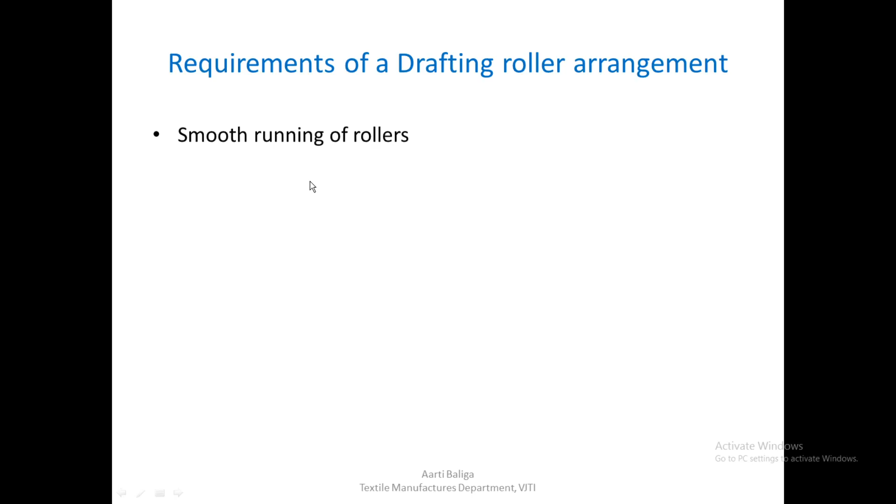We know that the rollers have to run smoothly. They should avoid roller slip. They should avoid roller lapping. There should be good control of fibers during drafting, otherwise we would get an irregular sliver.

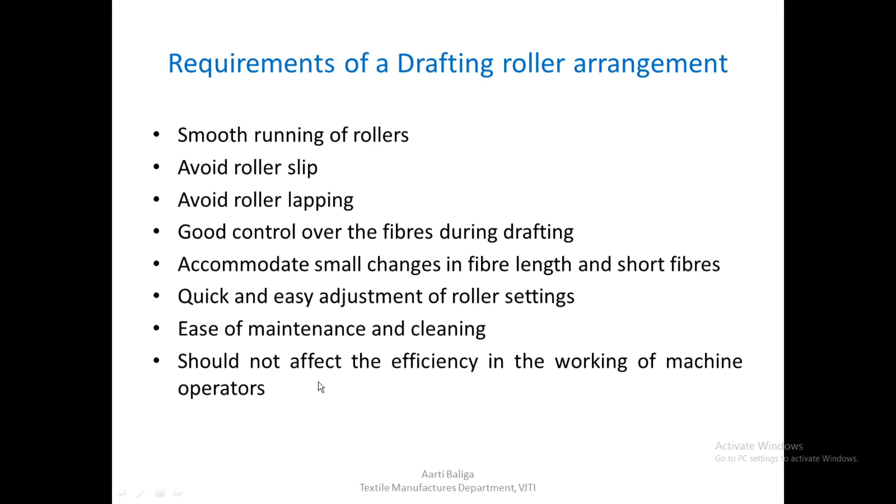The arrangement should accommodate small changes in fiber length and also provide better guidance for short fibers. The adjustments of roller setting should be quick and easy. It should be easy to maintain and clean, and also at the same time should not affect the efficiency of the working of the personnel or the operator on the machine. It should be quite easy for him, so he would be efficient in doing the job at hand.

So let us begin with the 4/4 drafting arrangement. When I say 4/4, there are 4 bottom rollers, 1, 2, 3, 4, and 4 top rollers. So 4 top rollers over 4 bottom rollers. That is how it is named.

What we see here is the rollers are all in one line. The nips are on one single line here. And what you can see is there's a 90 degree angle when the sliver is going into the can.

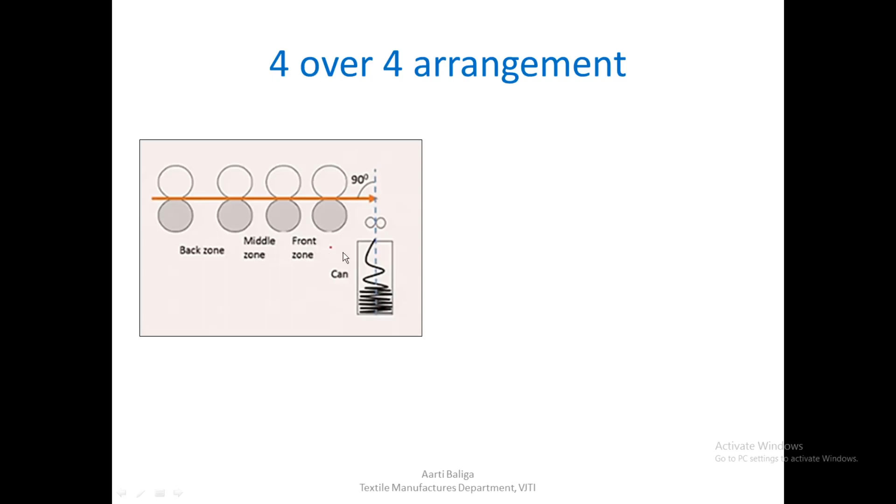There are 3 zones that we can observe here. The roller nips are in the horizontal plane and the axis of the delivery can is perpendicular to the nip line. The sliver has to turn at an angle of 90 degrees before it is coiled into the can, leading to irregularity. We've seen before that if the sliver has to turn through a large angle before entering the can, this can be a cause for irregularity.

Some changes have been made in the drafting arrangements that we're going to see later on, and at higher delivery speeds, this becomes more important.

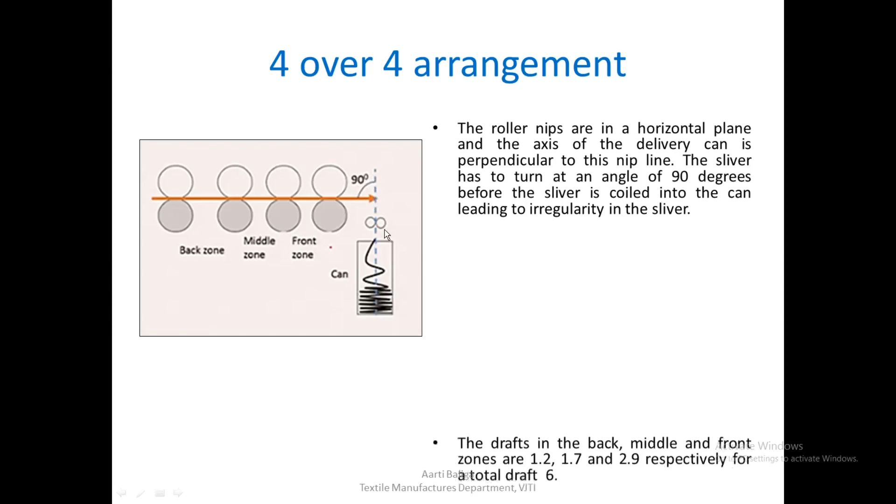The drafts in the back, middle and front zone are 1.2, 1.7 and 2.9 respectively, for a total draft of around 6, when you multiply these 3 drafts together. You can also observe that maximum draft has been kept in the front zone.

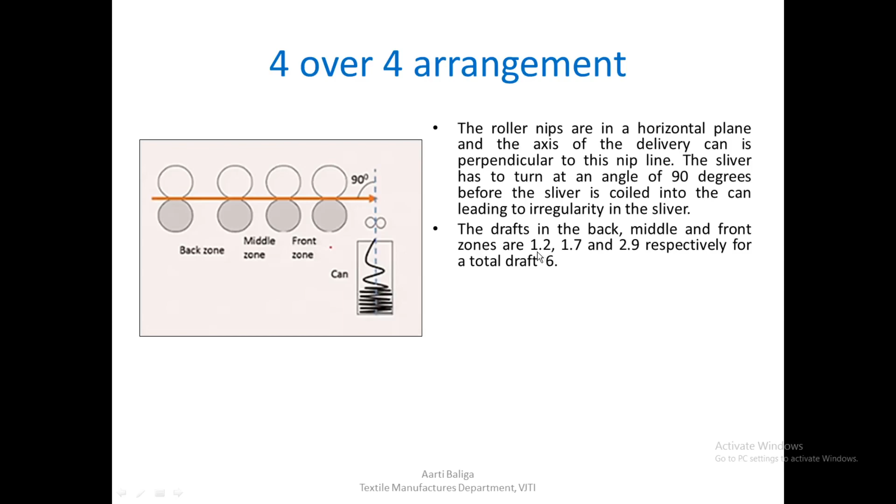This draft here is called a break draft, which we will see later. All the rollers are of the same diameter, as you can observe.

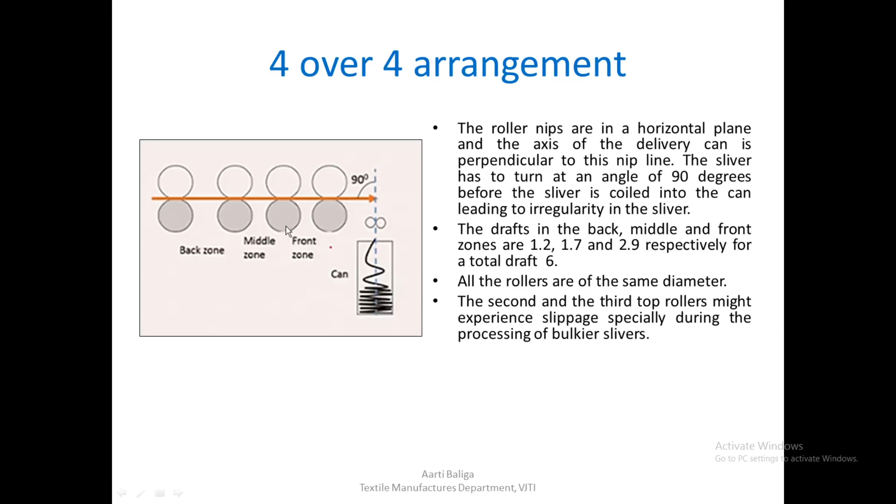Also, the second and third top rollers might experience slippage. When we saw roller slippage during one of our lectures, we can easily see that there are forces acting on the top rollers of these two pairs of rollers, and these might experience some kind of slippage because of the fiber movement in this zone. This is especially relevant, or happens too frequently, in the case of bulkier slivers being processed. So this is the drawback of this kind of arrangement.

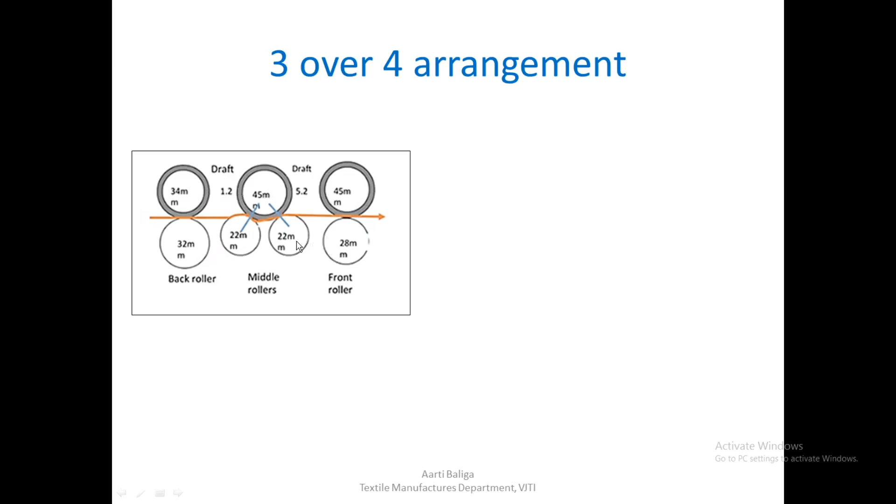So a new system was evolved, which is the 3/4 arrangement. Here you can see 3/4 means 3 top rollers over 4 bottom rollers. There is a large common top roller which is placed on the second and the third bottom rollers. This is the common top roller.

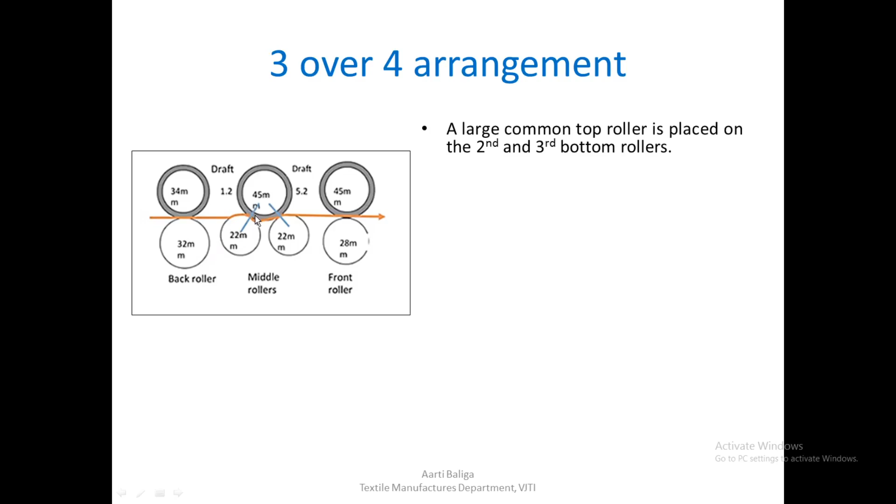This helps in separating the front and the back drafting zones, and therefore the system is effectively a 2-zone drafting system. This particular area is a neutral zone basically, and that is why we are able to separate the front and the back drafting zone.

The difference from the previous 4/4 drafting zone is that earlier there were 3 drafting zones, front, middle and back. Here what you can see is there is just one draft applied between the back and this pair of rollers. This acts like a nip, the top and the bottom roller at this place, and this particular blue line shows the other nip, which acts like a back roller nip for this particular front roller.

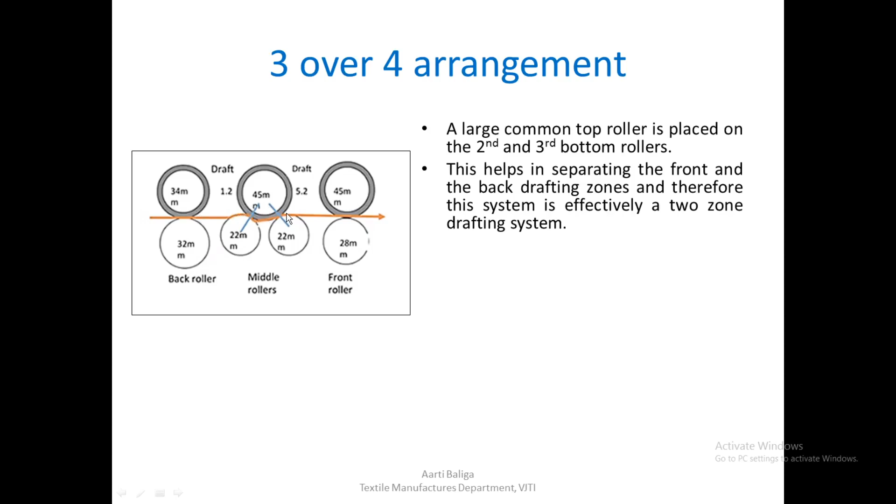So you can observe that there are only two drafting zones here. Since the second and the third roller pairs run at the same surface speed, there is no draft applied here, and the zone is a neutral zone. As I mentioned, these two rollers would be running at the same surface speeds, and that is why there is no drafting happening in this area, and therefore it is only a two zone drafting system.

So what have we achieved by making this roller a common top roller is that we have avoided roller slippage, and also because we have kept this as a neutral zone, there is no chance of this top roller experiencing some kind of forces in this zone, and we are avoiding roller slippage here.

The disadvantage here is that the nip to nip distance is increased. If this roller was exactly over the top roller, the nip line would be somewhere here, and the nip to nip distance would be reduced. But since this roller is kept in this manner, the nip line has shifted, making it unsuitable for short fibers. Shorter fibers have to travel much more distance from the earlier nip line to the current nip line, which is at a larger distance from the back roller nip, so it might be unsuitable for processing short fibers.

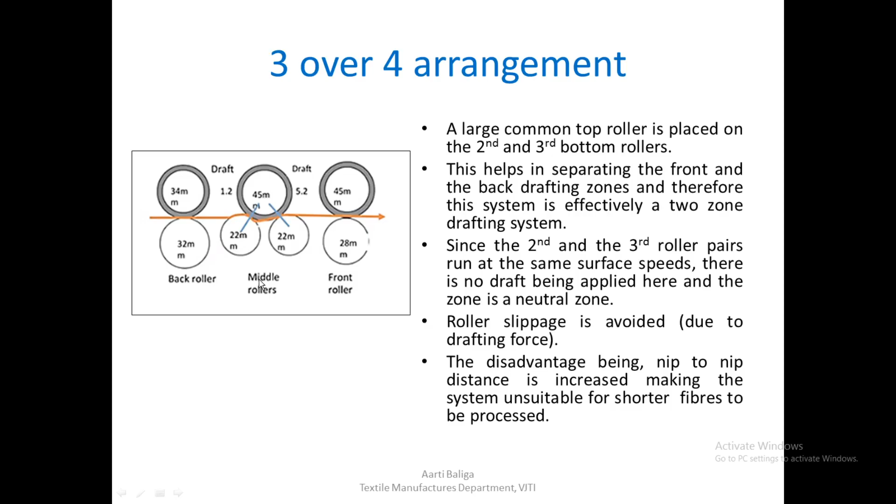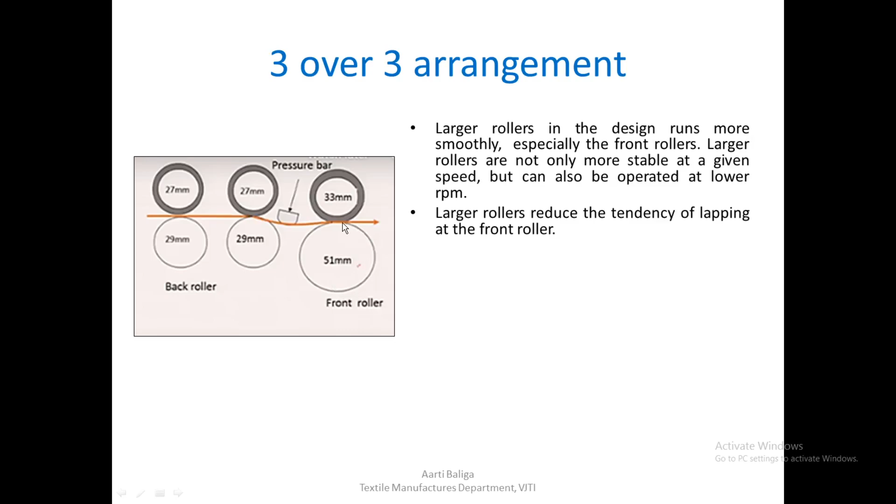Now we come to the next system, the 3/3 arrangement, and let us see the advantages. Larger rollers in the design, you can see the diameter of the front roller has increased, which runs more smoothly, especially the front rollers. Larger rollers are better and more stable, and can be run at a slower speed or RPM, which makes the bearings wear out over a longer period and last longer. So you are making the system more stable by making these rollers a bit larger than normal. Larger rollers also reduce the tendency of lapping at the front roller. Lapping is a defect where the fibers tend to stick to the rollers and form a lap, and this tendency is reduced when the rollers are larger in size.

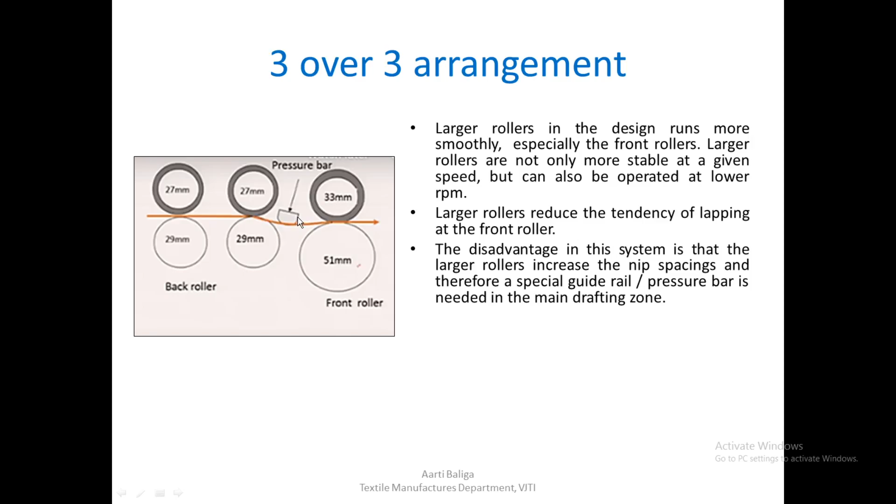The disadvantage of this system is that the large rollers increase the nip spacing. Again, the previous problem is repeated here. Large rollers increase the nip spacing, and therefore a special guide rail, known as a pressure bar, is kept in the main drafting zone. How does it help? The pressure bar in the front zone provides guidance to the short fibers by deflecting them due to frictional force. Because we have increased the roller diameter, the nip to nip distance cannot be brought closer than the point where the rollers start touching each other, so short fibers cannot be processed. Due to this problem of large nip to nip distance, I need better guidance, so I introduce a pressure bar in the main drafting zone.

How it helps is it deflects the fibers from the normal path of fiber movement. Because of this, slow moving fibers or floating fibers, which would have otherwise been pulled by the front roller out of turn, are slowed down by deflecting them at this place, and are prevented from reaching the front roller nip out of turn. That is why, to a certain extent, this pressure bar helps in controlling the irregularity.

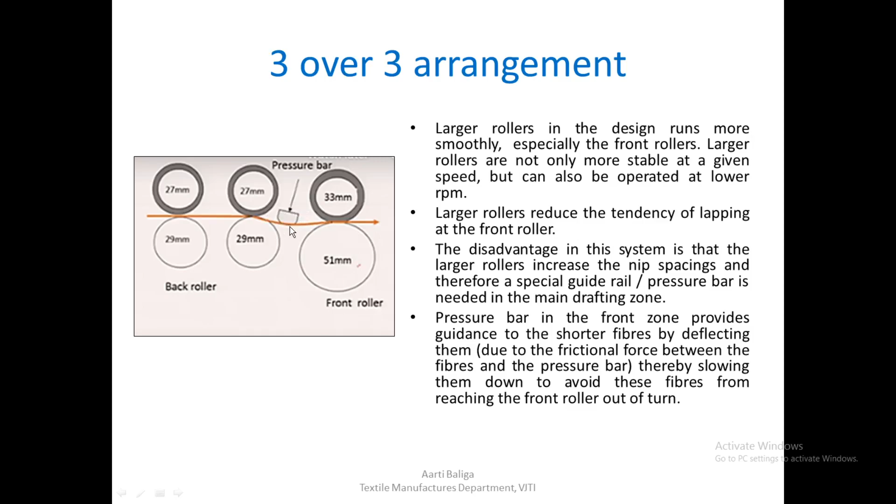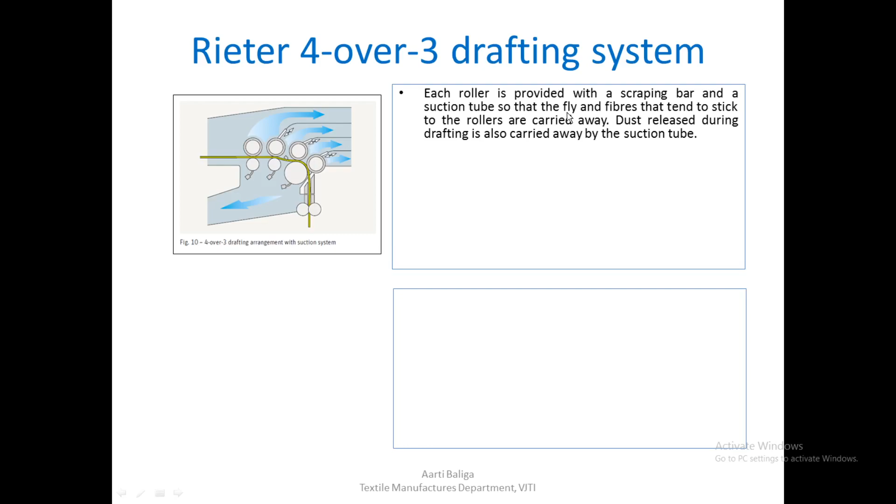Now we look at the next system, the Rieter 4/3 drafting system, with 4 top rollers placed on 3 bottom drafting rollers. Let us see the features. Each roller is provided with a scraping bar. There are scraping bars, as we have seen in the video earlier, and a suction tube which allows fly and fibers that stick to the rollers to be taken away and carried off. Dust released during drafting is also carried away by the suction tubes.

Drafting is a good place to get rid of most of the dust, because there's a huge amount of friction between fibers and the rollers, due to which the dust might be released. In the earlier conventional system, there was no way to remove this dust, and it would just be released into the atmosphere. Here, by applying this suction, all the dust can be removed immediately.

Scraping bars are intermittently lifted from the top rollers to allow smooth removal of fibers stuck to the rollers. Scraping bars are frequently pulled away or lifted, so that whatever gets collected is removed, as we have seen in the video. The scraping bars are just lifted, and whatever gets collected here is removed by suction.

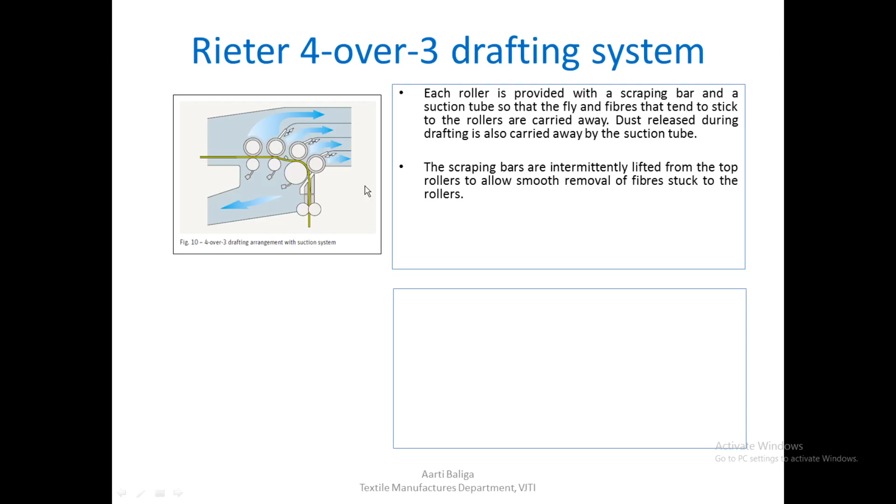Filters in the dust removal system are cleaned manually or by a wiper. Whatever accumulates on the filter, those short fibers and dust, is removed either manually over a period of time, or there is an automatic wiper which has to maintain constant cleaning efficiency of the filters. These wipers see to it that the filters are kept clean.

So let us look at the advantages of this kind of arrangement. There are 2 top rollers on the front bottom roller. Still it is a 2 drafting zone system. One drafting zone is between these 2 rollers, and the second drafting zone is between these 2 rollers.

There is one additional top roller which has been added here. This ensures that the drafted web, whatever comes out, is pressed against the bottom roller surface and follows this particular curvature. Otherwise, if this was the nip line, it would not follow this path. So by adding this, the system has taken care of the nip to nip spacing.

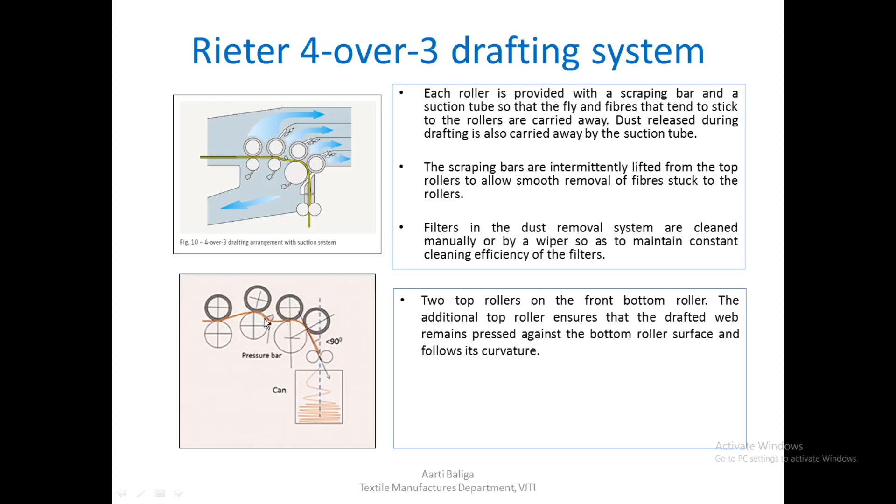Although this is a large roller here, we can see that nip to nip distance can be shorter, so I can now process shorter fibers, which was a disadvantage in the 3/3 drafting system we saw earlier. Also, there is a pressure bar in the front zone, and the delivery roller nip line, the final nip, and the axis of the can are at an angle less than 90 degrees, and this minimizes the diversion as the sliver enters the can coiler tube.

Also you can observe the roller nips are at different planes. All the nips are not in one single line as in the conventional system. They follow some sort of curvature over here. The pressure bar, as I've already mentioned, is there in the front drafting zone.

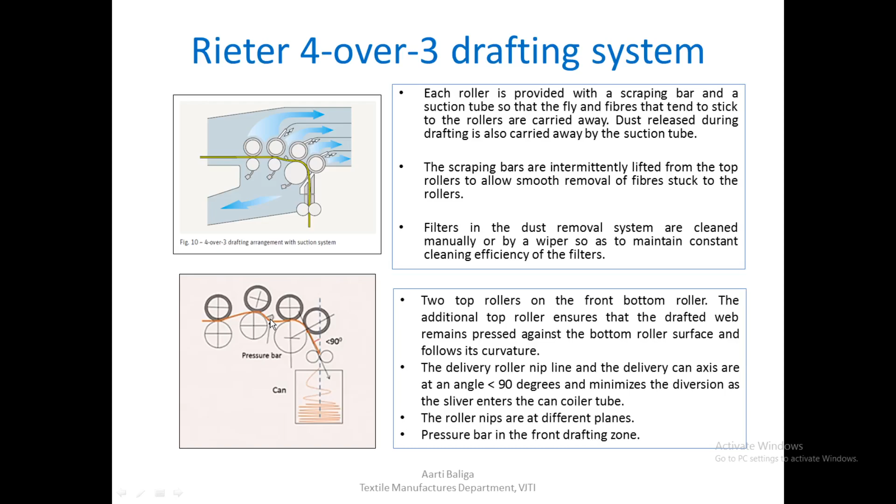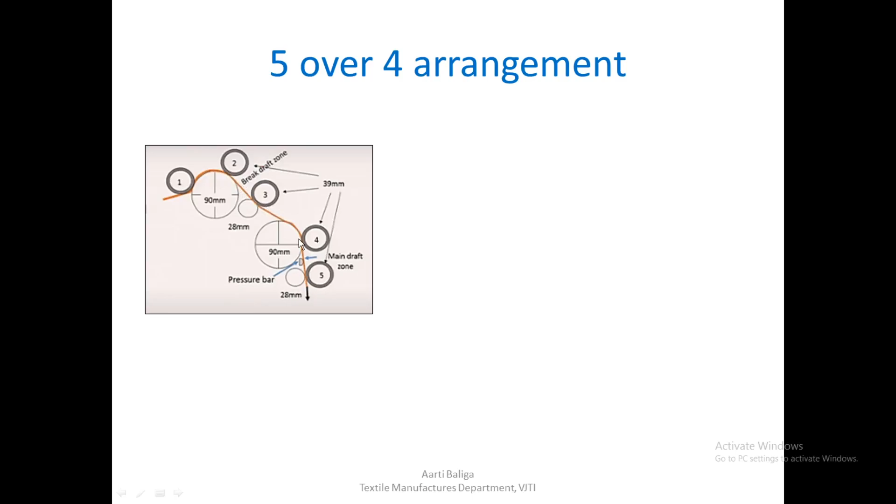So basically what is tried here is all the problems with the previous system are taken care of, and even the extra rollers that are there, like this one over here, would help in maintaining the contact between the fiber and the bottom roller so that they move around the curvature. Also, you can see the pressure bar in the main drafting zone.

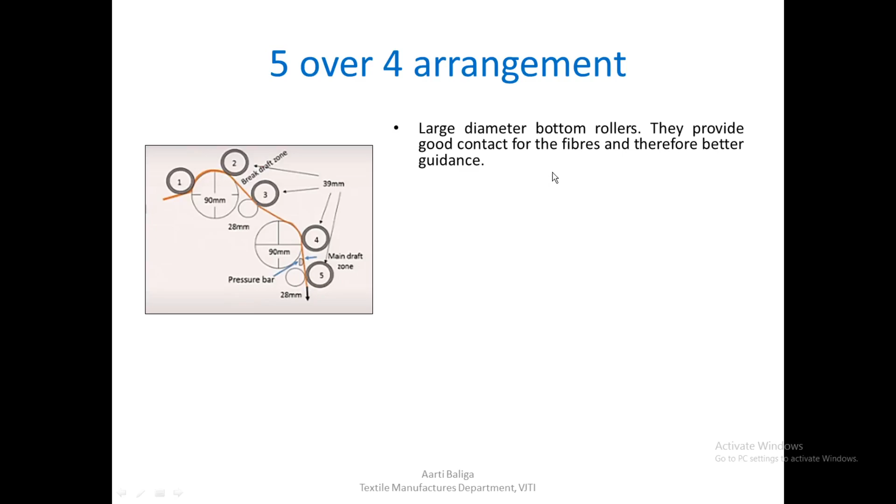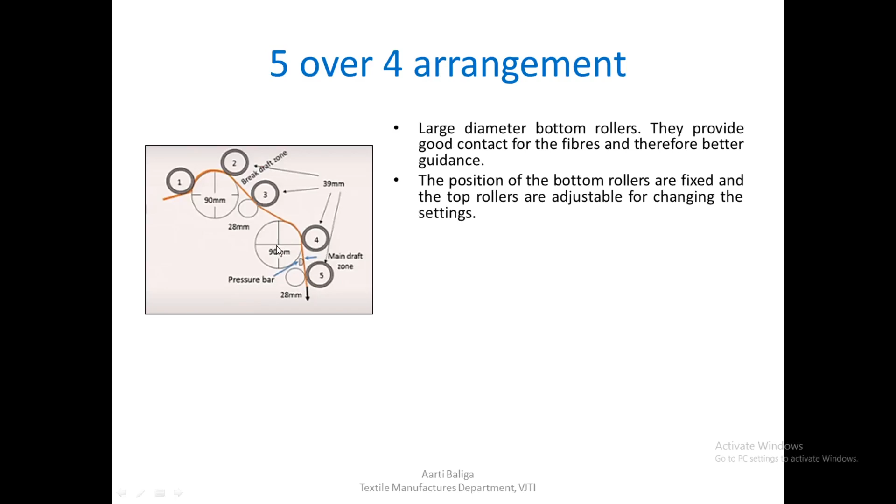So large diameter bottom rollers provide good contact for the fibers and therefore better guidance. The position of the bottom rollers are fixed. As you can see, these two main bottom rollers are fixed, and the top rollers are adjusted for changing the settings.

So if I want to change the setting in this zone for length, then I will move this roller to over here. The rollers are arranged so that the fibers follow a curved path. Only two zones, main and break draft zone, in spite of the large number of rollers in the system.

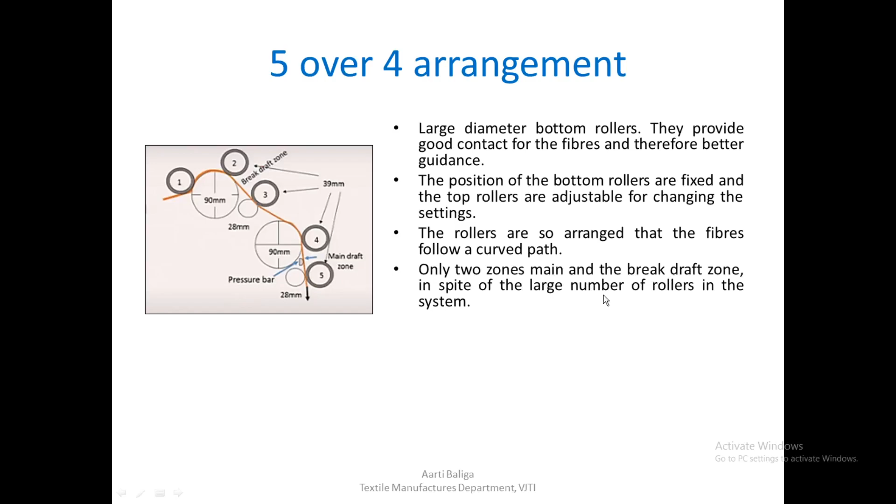Pressure bar in the main drafting zone, and also almost vertical delivery of slivers to the delivery can, almost vertical. The can would be somewhere over here, and the angle is not even less than 90, it is almost vertical, tending towards zero. So absolutely no diversion of the sliver. As soon as it comes out, it will enter the can.

The sliver turning angles become more critical as the delivery speeds are increasing. As we already know, if the sliver diversion is too much, it may lead to a lot of irregularity. So this turning angle has also been taken care of, almost tending towards zero.

The nip distances are changed by moving roller number 2 and 4. Roller 2 would change the back zone setting, and you can move roller 4 to change the nip setting in the main drafting zone.

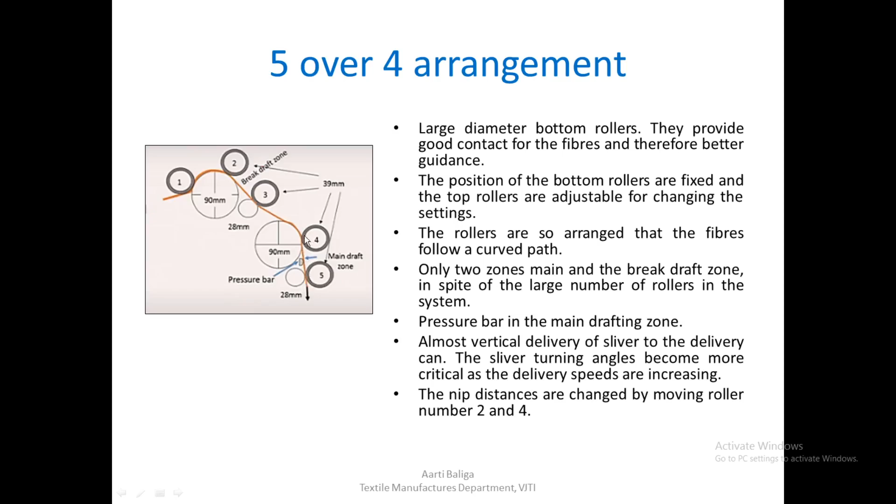So that's it for today. We have seen the different drafting systems and how they have evolved over a period of time, and how they have been able to tackle some of the problems that were seen in each drafting system, starting from the conventional 4/4. And that is it for today. Thank you.